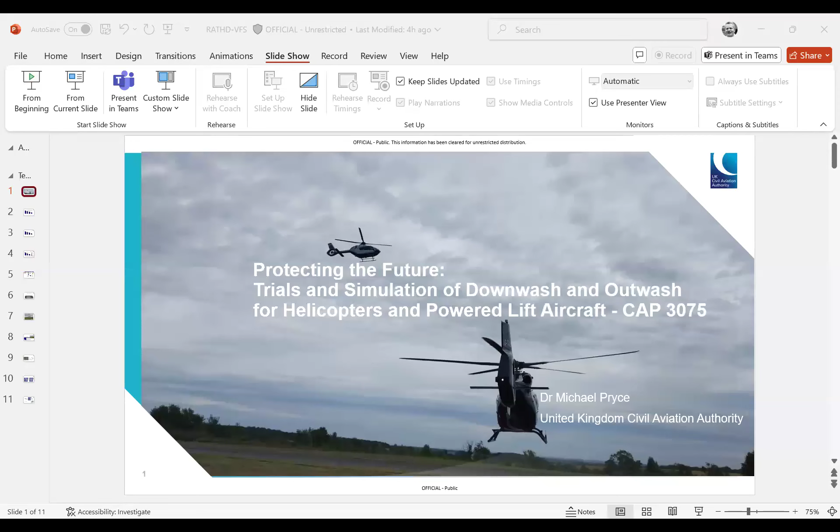I'm going to try and share my slides. It's that part of the presentation where we hopefully see that it works. So hopefully you should see some slides now. So we're seeing the regular slideshow, not the presentation mode. It should be. Yeah, you should. There you go. Okay. That looks great.

There you go. I know a lot of interest will possibly be around the eVTOLs around this presentation. The picture there literally paints 1,000 words. Most of our research has been done on helicopters in the real world and simulations on eVTOLs. And the key part of the work we do lately is how do you relate current knowledge to future aircraft? So we've published a paper recently, CAP 3075, that's available on the CAA webpage. CAP 3075 is a fairly light read, I would say, but it's backed up by another paper that I'll reference during the presentation that Richard did a lot of work on, that has the maths and so on.

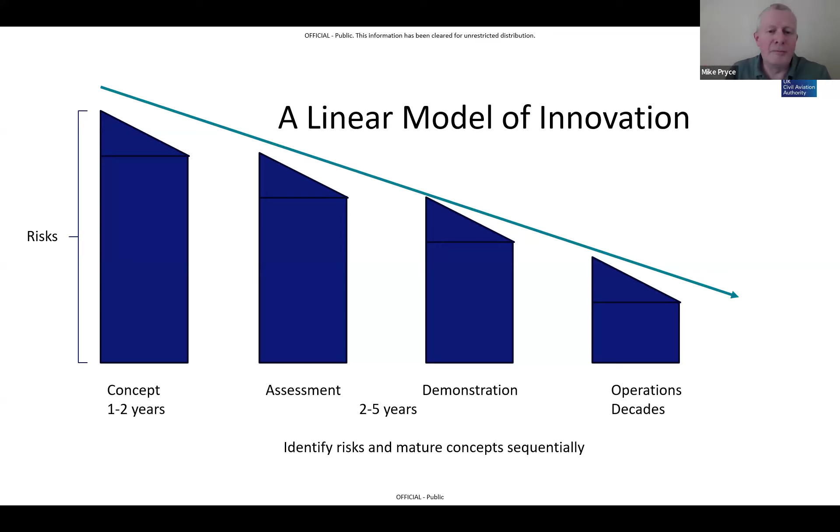I'm going to start by presenting the background and the philosophy to the work. And obviously, because of that interest in eVTOL that the community has, there is a kind of a linear model of innovation, which is you start off with a lot of uncertainty and risk, and you try to winnow it down over time. If you're an OEM, you might generate a large number of initial designs, and then you fly a prototype, and then you refine that prototype, and you end up with an operational aircraft. And if you're a regulator, you kind of look at these new concepts and you think, well, what do we need to do to change things, potentially change regulations to enable them to fly? And that's a very straightforward process, and it looks very neat on the screen.

Reality and innovation is often messier, however. But there is one thing about aviation. It's not entirely new. There is a lot of experience and knowledge out there. Can we use that experience and knowledge from current operations to feed it back into new concepts, into all the work that has to be done to get from the design screen onto the flight line? And the key thing, I think, is that with innovation, it's all about change. There are things you hope are going to happen that don't, and vice versa. But if you focus on your objectives, which are safe, reliable aircraft that make money and give consumers what they want, then you can be flexible in the processes. And that's the approach we've taken in part of the CAA.

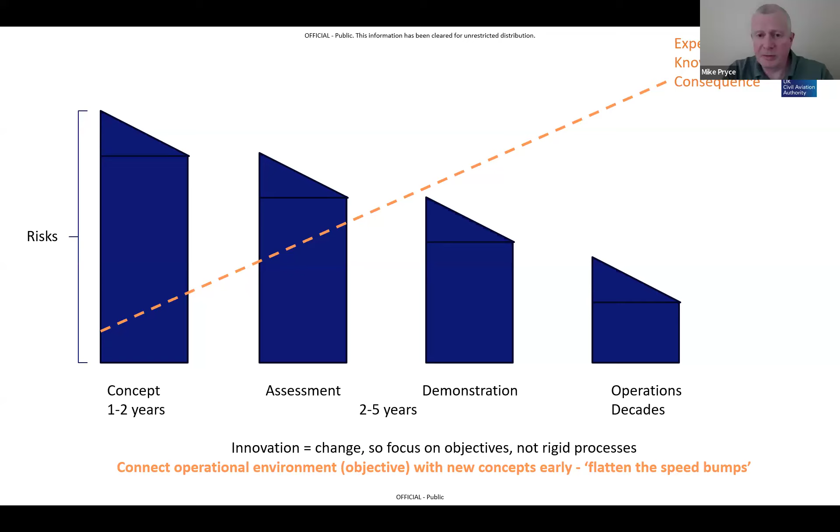So we have an innovation team who are doing the left hand of this picture with industry. We're also working with the right hand of this picture from the operations perspective, trying to see how we can work with our innovation colleagues, inform them from current operations. And really the way I think of it is we're out to kind of flatten the speed bumps that may be lying in the way of innovators so that they don't have any surprises.

But one surprise we did have was an accident in the UK 3 years ago now, where a search and rescue helicopter, a Sikorsky S-92, was landing at Derriford Hospital. In the UK, because we don't have many wide open spaces, hospital landing pads are often quite close to the hospital. In this case, it was in the hospital car park. There was what they call a blast wall to try to protect the public. But a member of the public was blown over and tragically killed. There was no fault from the operators and the pilots. It's just the nature of downwash and the proximity of the third party.

Obviously, that gets a lot of attention in terms of any aviation authority. Uninvolved third parties on the ground are a no-no. You just don't want anything to happen to them. Certainly not a fatality. So what we wanted to do is, could we learn from this incident and consider possible risks for eVTOL downwash so that we can enable eVTOLs to operate safely and for people on the ground to remain safe when they do so? And the objective really is to kind of push down that learning curve earlier on in the cycle from current experience.

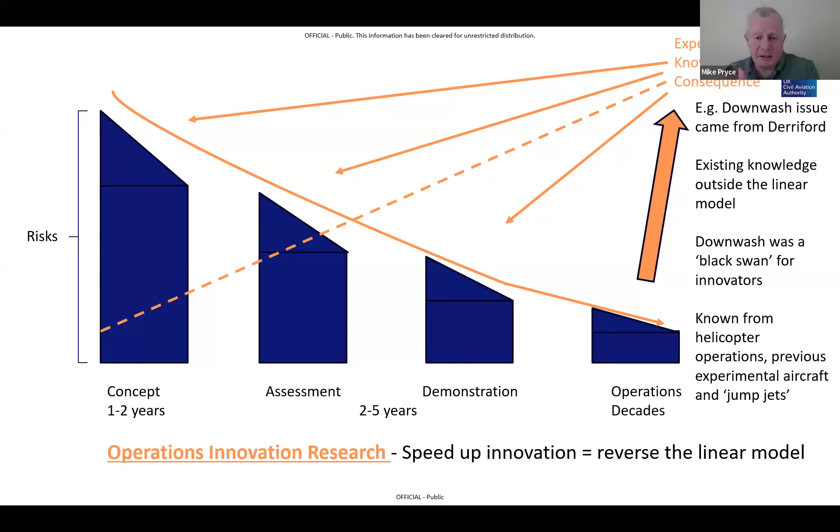So the process I've named it is Operations Innovation Research, but it is very much working backwards. It's working from the current world we're in and trying to inform future innovation as it's coming down the pike.

So with that theoretical aspect looked at, what we considered was, well, we kind of want to go on a journey, and we don't want to just be preaching theory to people. We want to come up with a bunch of tools that they can use. But to get those tools, we'd have to do some work.

And where we started 3 years ago was there was a body of work that's been created by NASA, companies like BAE Systems in the UK, Cranfield, Dstl. I've worked in some of these places, seen some of this work. And in the CAA, we had already been informally considering this around eVTOL and helicopter downwash.

Then the Derriford accident led to a directive from the CAA board that we need to investigate this. So we went out to industry for some research tenders, and Sophrodyne was selected. As doing the process of selection, there was quite a wide variety of approaches you could take to this work.

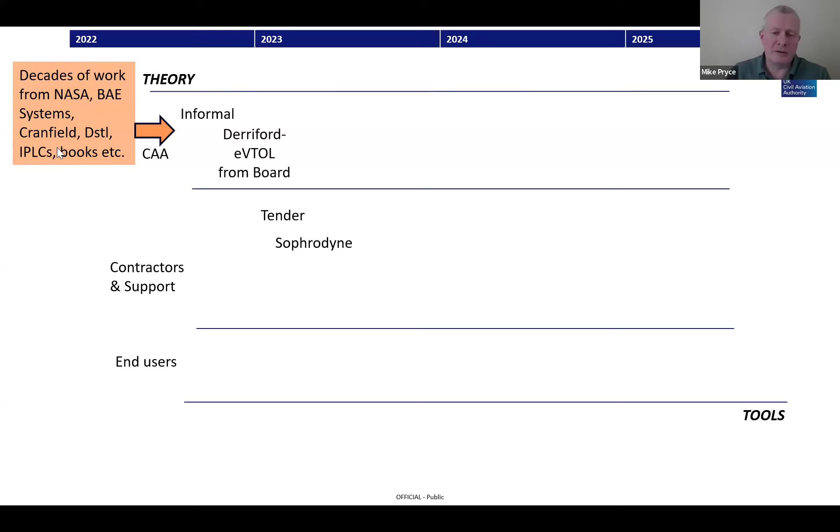So one of the things we did at the CAA is we came up with our own literal PowerPoint engineered configurations, very simple aeroplanes that you could add or take away different propulsion concepts to them so that we could compare digitally a range of different concepts. That was informed by the previous literature we had. That was handed over to Sophrodyne.

They ran their simulations, and Richard Brown will tell you it's not as easy as I just made it. I think some of the simulations, just one scenario, would take 6 weeks to run. So quite a lot of software was running this, a lot of processing power.

Sophrodyne wrote a report CAP 2576A, which is about, I think, 85 pages, if I remember rightly, very mathematical. We topped and tailed it with an introduction and some appendices, and issued that as CAP 2576 in October 2023. But the key thing there was we briefed it to industry.

We had some involvement. There were some offers of real world data, although at the time we weren't able to get them. But from the simulations, what we could see is they pretty well matched with what we expected from the work that had been done and the configurations we generated. But we did want to have a more specific verification and validation process.

So we came up with this project called RATHD, a research assessment of transitory helicopter downwash. And the reason we went for helicopters was in the UK at the time we had no flying eVTOLs, but also as part of the work for CAP 2576, we had looked at helicopters, both conventional disc loading helicopters and an imaginary helicopter with the disc loading of an eVTOL.

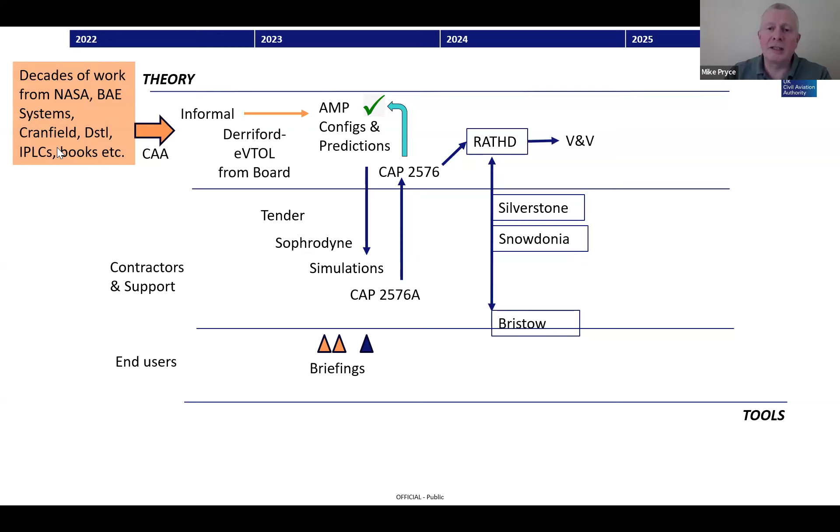Also, because it was large, we knew that we would be able to get significant readings from it without necessarily putting us in too much danger in terms of having to stand too close to the helicopter. So the object there was to verify and validate what had happened in the previous work with Sophrodyne. But Sophrodyne also were given some data that we'd measured and asked to simulate that, see if what you can run in the simulation matches what we found in the real world.

While this project was going on, we also got data from the FAA, where luckily they had 3 types of eVTOLs they could access there, and they had actually measured some real world data, so that was thrown into the mix. As you'll see, if you access on the CAA website CAP 3075, all that's written up. But the objective is to have these tools, and these are what we're now working on.

But there was also a surprise, which was a cognitive issue. When we were doing the real world measurements, what we found is we became cognitively impaired. I'll go into the detail in that a little bit more. And it struck us that that's something that hadn't been seen before, but obviously for third parties on the ground could potentially be quite significant. So we also fed that into the approach of generating tools, and we briefed industry and incorporated the FAA data as part of that activity.

chaotic situation. And as Richard will talk about, we have this assumption that helicopter downwash is just a perfect circle almost. But in reality, what we found and what we felt was actually it's much more turbulent, much more chaotic, and also unexpected in many ways. I think there's mental models that are created by training handbooks and textbooks and so on that make you think it's going to be a steady wind, but actually it's a series of powerful gusts that you feel in a constant outwash field, supposedly. And it's the nature of those gusts that appear to be quite unsafe and cause risks for people.

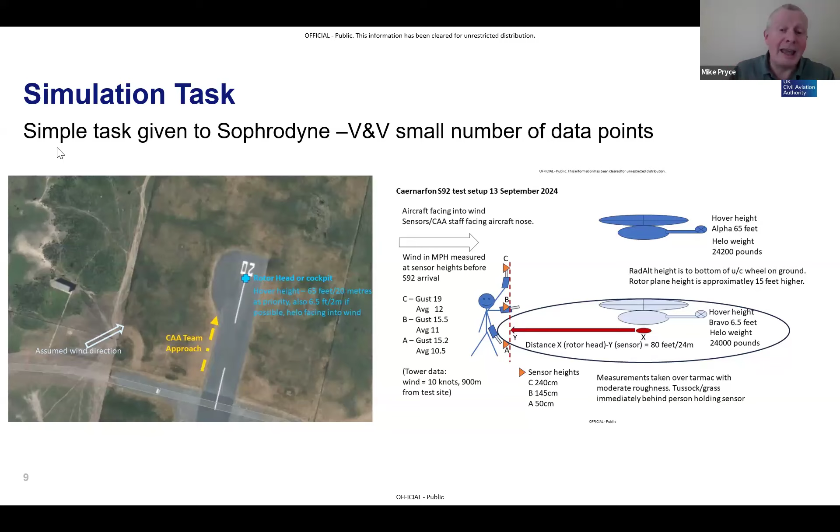But the key thing was we got quite good measurements, I think, considering we were using really coarse tools. Initially, my belief was we could do quite sophisticated analysis on the data and produce a distribution of probabilities and so on using Weibull analysis. In reality, the physical experience of feeling downwash made me question some of that, because what the data shows versus what actually seeing the air tells you struck me as being more important. And again, Richard will show that in some of the videos he's showing.

But what we did see when we got to see the air was, these are simplified egg-type helicopters. Sophrodyne also simulated much more detailed S92 models. But what we saw was a lot of the training manuals have instantaneous average velocities in effect.

The picture on the right there, there's a donut, a circular pattern of airflow. That's what downwash is. If you draw a line around that, you can stay outside the danger area. And what we found with helicopters was actually it's much more turbulent. The red is the higher velocities, and that kind of accorded with the experience.

It literally felt like being punched by the air when you stood in front of the helicopter. It's not being pushed over by a constant force, it's being buffeted backwards and forwards. And actually that can disturb your balance, and it can be really challenging to deal with. At the same time, if you expect it, it's less challenging, is what I found, and other colleagues seem to.

But you can see there on that picture that in some cases there's virtually, I mean, this image I like because it accords to our test conditions, which is 30 degrees off the nose to the left. There was virtually nothing that we felt initially, but right on the nose, there were more powerful flows that we could feel. The animations that Richard showed will bring this to life in a much more interesting way than the static images.

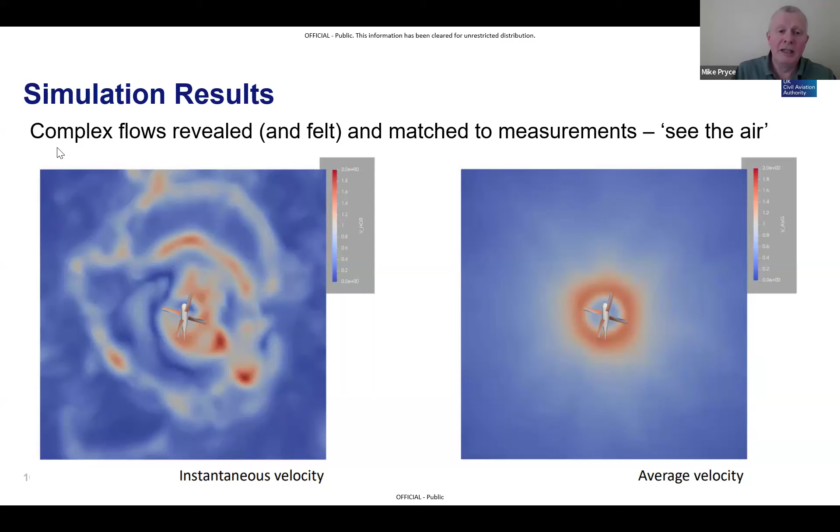But I think that image does capture the fundamental findings of a lot of the research, was that helicopters have chaotic patterns of outwash, just as we had predicted in our earlier work eVTOLs would. And it's an interesting finding that we have lived with these patterns of helicopter outwash for a long time. So perhaps we can really learn from them to inform eVTOL operations.

But what we felt was that the verification and validation that we'd undertaken had worked within the hoped-for outcomes. It hadn't necessarily followed the path we'd expected, but with all research, I think you have to expect the unexpected and deal with it as it comes up. And the cognitive side of things certainly brought that up. But equally, the chance to visualize air rather than just simply gather data on it, I felt was important.

We did use simple equipment, and this is an approach that could be a method that the user community more broadly could follow with limited training. So I think that one of the interesting things about this work is it does offer the potential for a simple approach to be used by people to start to get a feel for this issue.

But the outputs, really, the tools that we come up with are, as Richard will show, the videos. I think we can use the videos that we use as part of the simulations actually for training. The visualization of the airflow is hugely important. I think when Richard first showed me one of his videos, I told him I wanted to give him a hug because it would save lives. It was that powerful of a feeling, because I could literally see in the simulation what you feel standing in the position where I was, looking at the helicopter as the simulation showed it.

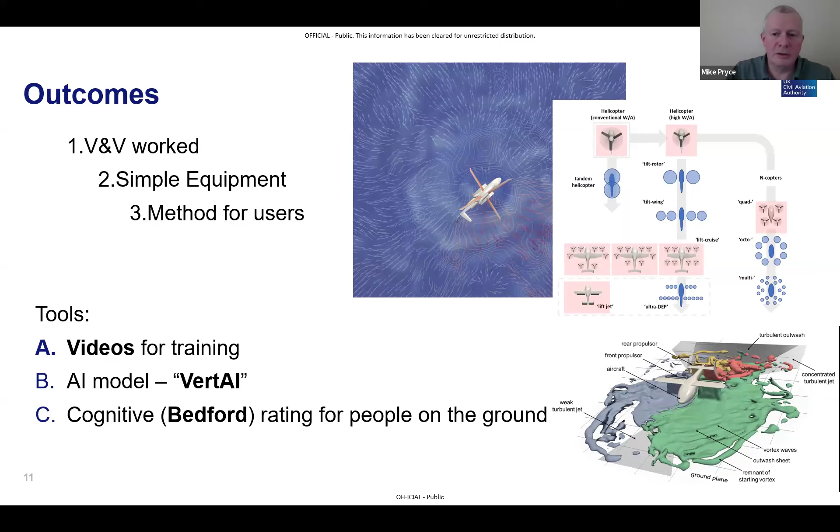All right, let me see if I can start this successfully. Okay, hopefully you can see the presentation. Yes, perfect. Excellent.

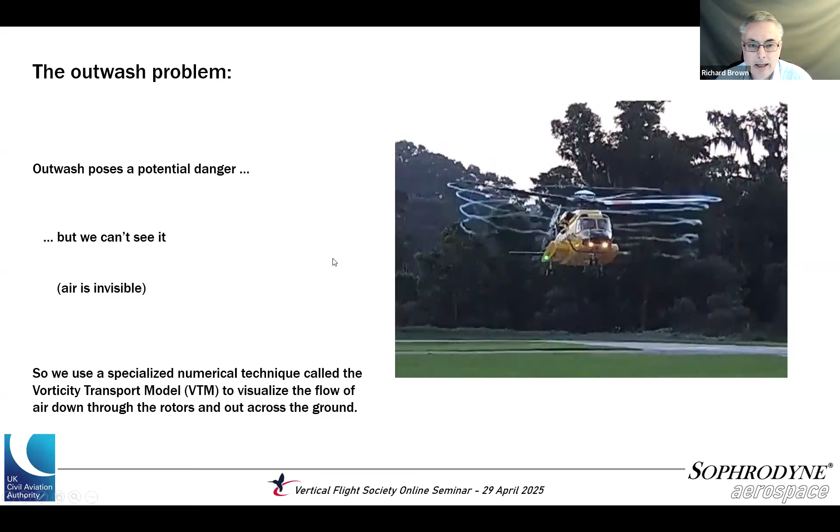Now, the VTM is a well-established method. It's been in development for something like 30 years. It's been used extensively to model various particular aerodynamic issues surrounding rotorcraft. But outwash was perhaps one of the most challenging applications of the code that we've come across so far. Let me try and explain to you a little bit of the detail of how we would go about simulating a system like this. The first thing, of course, is when you set up a numerical simulation is you have to have some sort of faith in its predictions.

And so what you tend to do is you start off by constructing your code and verifying that it actually works mathematically, but then you go through a process called validation. And what that involves is comparing the predictions of the code against those parts of the flow that you can actually visualize in some sense. So what I'm suggesting here is that in a very simple fashion, we might go about comparing the predictions of the VTM, in this case of the positions of the tip vortices, with the positions of the tip vortices that we see in real life. And we might be interested in measuring, for example, the spacing of the tip vortices, how fast they decay down below the system, and trying to confirm that the code is working properly against what we see in reality.

And that tends to be a back and forward process. So when you measure things in the real world, sometimes those measurements are subject to inaccuracy, and the numerics can actually inform better measurement process. And in some cases, the real world yields information which you can incorporate into the numerics and improve the predictions. And I think in terms of the outwash situation, that's exactly what we're looking at here. This partnership between numerics and real world measurements is where we're going to really make progress.

But now, again, as I said, we're not seeing the whole picture here. So the real value in numerical simulations is being able to dig in and show parts of the physics which you cannot see by any other means. And that's what I'm going to try to explain to you in the next few slides. Okay, so let's step back a bit. So I'm going to step back really far, and there's my helicopter now hovering at some altitude above a big flat ground plane. Okay, we don't see much more than we would see in real life. But now let me do something. Let me take my numerical results and try to visualize those.

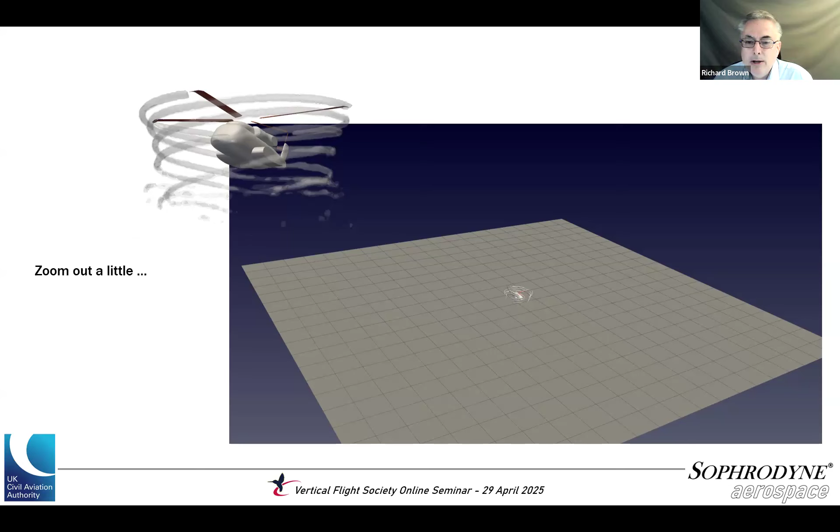And what I'm going to do here is plot a contour on which the vorticity in the flow has a constant value. The vorticity is the swirliness of the flow, if you like. It's associated with the tip vortices and the various structures that evolve as those tip vortices themselves disperse out across the ground plane.

Now, let me go a short distance into one of these simulations. So let's say something like 6 seconds or 25 rotor revolutions, if we're talking in real terms. And what you can see when you start to visualize these contours of vorticity is that the flow out away from the rotor has actually a tremendous amount of interest, and structure even. Okay, so what can I see here? I can see structures busy evolving out across the ground plane. And in fact, if I dig away at these simulations, I could see some of the fundamental physics taking place in front of my eyes.

So those very fine tip vortices that I showed, well, you can see them over here at the top of the slide. What we need to realize is that that vortical structure is inherently unstable. And as those vortices propagate down towards the ground and spread out, that instability morphs those vortices into much larger, more coagulated structures, which then propagate out across the ground. And eventually those structures all change in configuration and eventually dissipate through becoming tangled up in each other.

And if you have a look very, very closely, you can see some very interesting features. Let me change my pointer here so that you can see a little bit better. But you can see, for example, 2 vortices catching up here and about to roll around each other and turn into a bigger structure. Here you can see a bigger structure already formed.

And over here, you can see something really, really interesting, which will become very important when you talk about eVTOL outwash, and that is the formation of a hairpin structure on the ground. You can see this kink busy forming into, like a promontory, which will eventually lift up off the ground, turn into a vortex bullet and shoot out across the ground, causing very high local velocities.

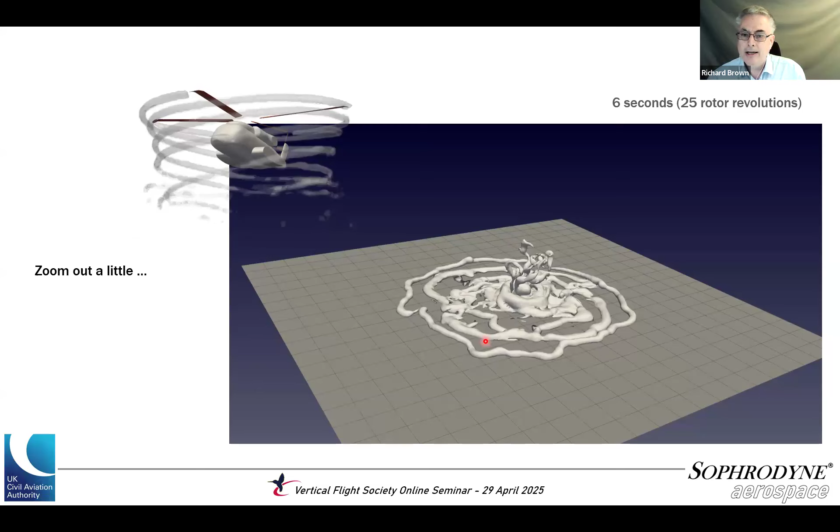Now that's 6 seconds into the simulation. That's nowhere near enough to be able to understand what's going on in the full simulation. We have to run these simulations for hundreds of rotor revolutions before the flow actually establishes itself properly on the ground. So if I do that and I advance the simulation here to about 250 rotor revolutions, you can see just how complex that outwash field actually becomes.

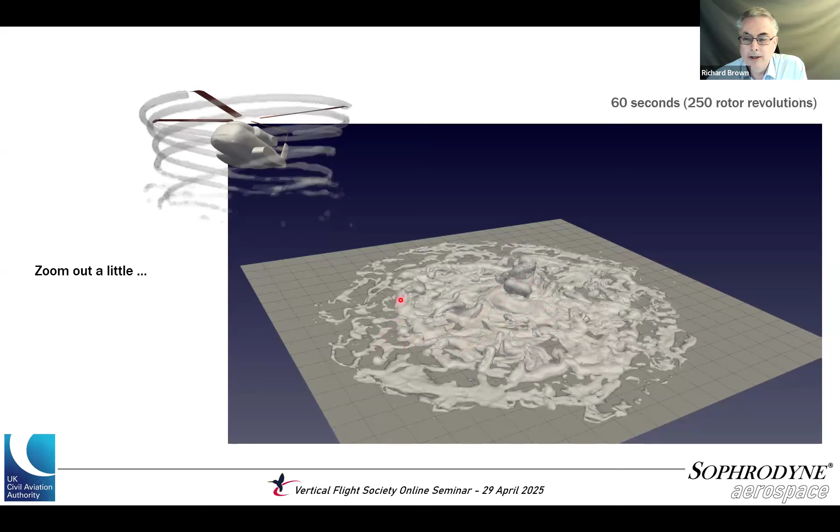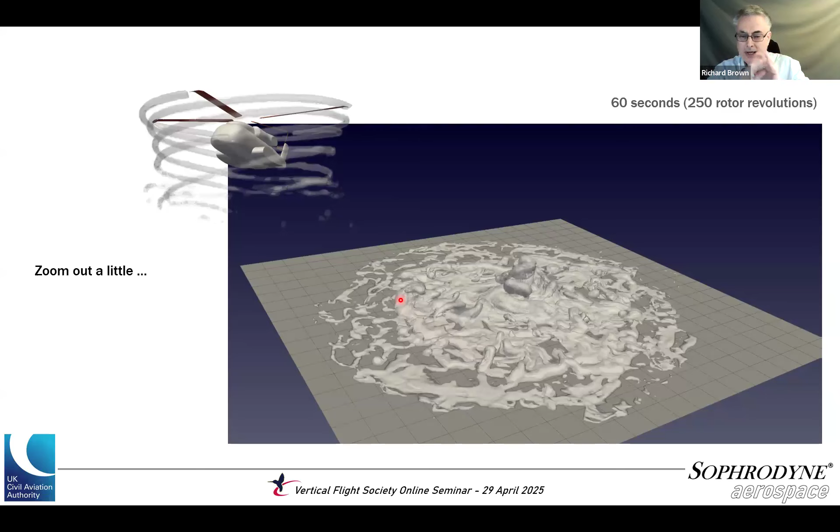So there is structure sitting inside here, but that structure is slowly morphing as the flow moves its way out across the ground. These bigger structures form, they interact with each other, they coagulate, they intertwine, they crenulate, and eventually they destroy each other through forming smaller and smaller structures. Almost like a descent from order into chaos. I wouldn't call it turbulence, but it's order into chaos, if you like.

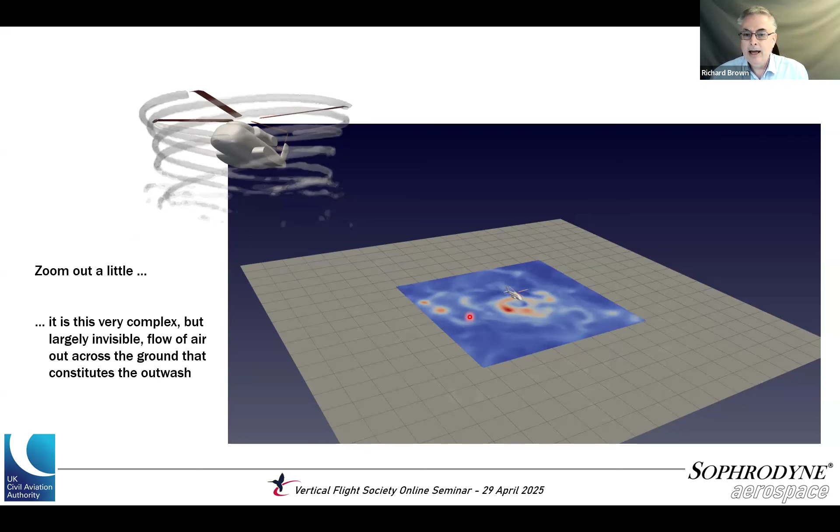Now, it's these individual structures on the ground that are responsible, in fact, for the velocity distribution on the ground. So if I try to show that, you can see in this picture here that the structures in the flow, these vortical structures, are responsible for the particular pattern of flow that we see out across the ground plane. So there we have it. We've gone from the structure of the flow to visualizing the velocity near the ground. And as in Mike's representation, throughout this presentation the higher velocities will be in red and the lower velocities will be in blue.

Okay, now, as Mike alluded to, one of the big problems within the community is that the traditional view of the outwash is as this steady, axisymmetric stream of air out down below the rotorcraft. So the flow comes down through the rotor, bends out when it hits the ground, and just continues outwards as a normally radially symmetric, uniform stream of air.

There's some theoretical justification for that particular approach, but generally what we're forced into when we do that is to adopt a turbulence-like approach rather than this order into chaos, this idea of vortical structures which evolve. Essentially what we tend to do is we adopt an approach which is something like this. We say that there's a mean velocity profile on top of which we can impose certain perturbations.

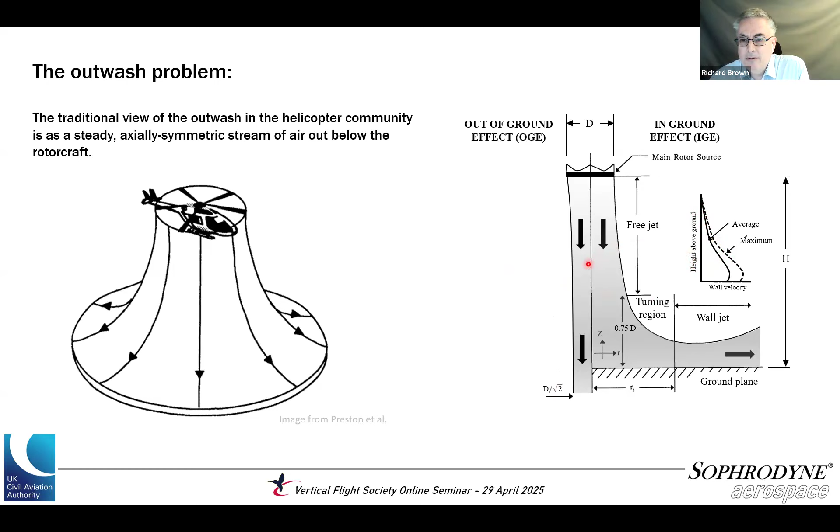But the whole idea is in terms of this mean, the steady flow of air on top of which there might be a little bit of wiggliness that might influence things. Now, the problem with that particular approach is that it's not particularly accurate, for one thing. The second problem is that this simplistic view of the outwash pervades a lot of the safety information that the

industry presently relies upon. So to pick on 2 particular examples, you'll see in this particular report, here's this idea of this inverted cone of outwash spreading out across the ground, if you like, and a few interesting effects, perhaps, of adding wind or movement across the ground. Now, believe you me that when you look at the simulations of these particular cases, the flow is a lot more interesting than you see in those particular examples there.

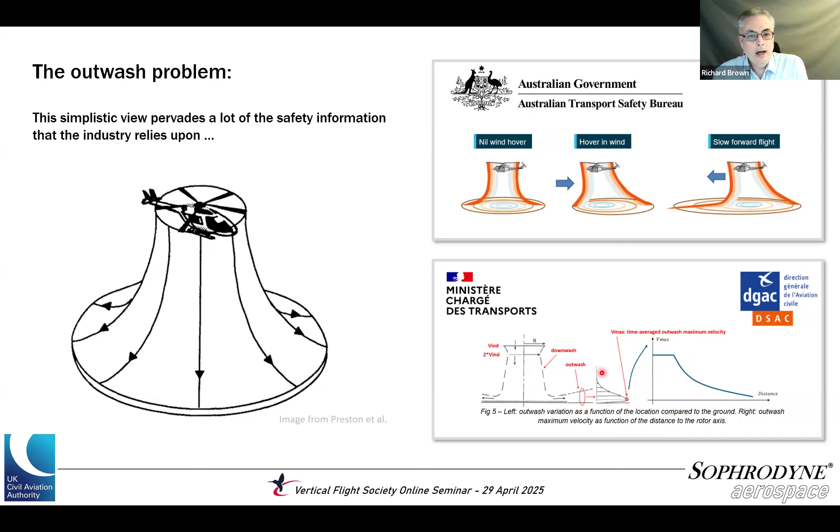If we have a look at this particular example, then this momentum-like idea of the outwash coming down and hitting the ground results in a model for how that velocity varies out across the ground. Something like this. And that has informed quite a lot of safety information that we use in the industry up to now. But the model doesn't actually represent physical reality particularly well.

Okay. Now, the interesting thing is that if I do run the simulations for several hundred rotor revolutions and try to calculate the average velocities in the outwash, then you do see this radially symmetric pattern. So the flow is axially symmetric about the helicopter, assuming that I haven't put in a tail rotor or any interesting fuselage interaction effects. But the flow tends to be axially symmetric and radially outwards in all directions. But this is only true in the mean.

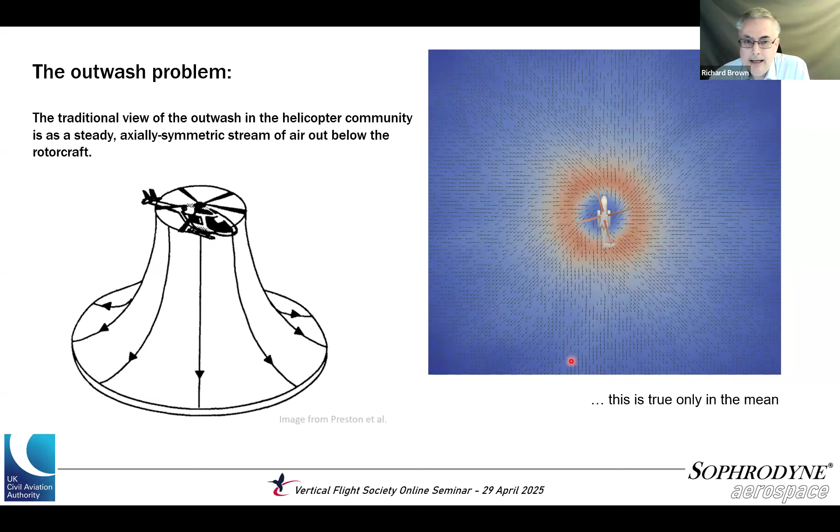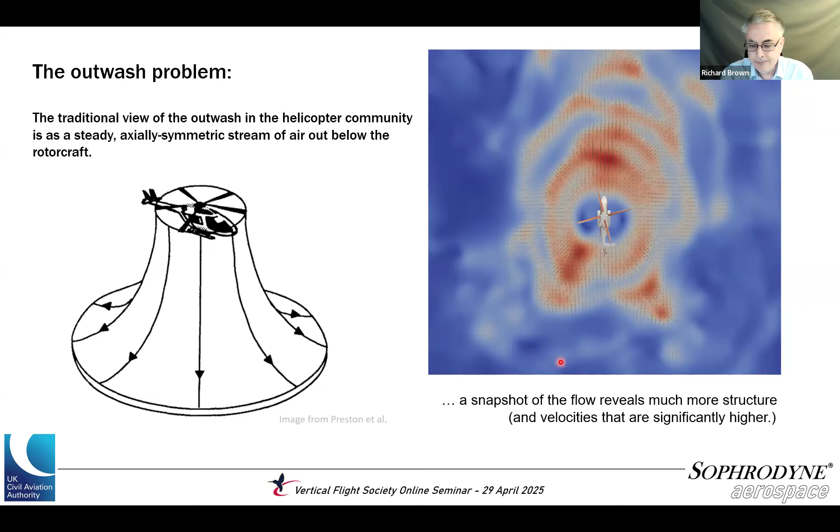And the mean, calculated over several hundred rotor revolutions, has very little reality or relevance to the case of somebody actually standing in that outwash and experiencing the outwash, where we know from our simulations and from Mike's measurements that the snapshot of the flow, an instantaneous picture of the outwash, shows that the velocity is much more inhomogeneous. There are these wave-like structures, if you like, these gusty-like effects, which propagate out across the ground and cause the flow experience at any particular point to be very unsteady and difficult to negotiate, as Mike experienced.

Okay, so much for the still images. What I want to show you now is a few videos which try to illustrate this in a little bit more detail. So this video shows how the velocity on the ground below this helicopter actually evolves with time. It's the S-92 hovering at fairly low altitude above the ground, and you'll see how the flow is actually very, very unsteady and granular. By no means radially symmetric.

It consists of these waves of vorticity, which result in this gusty outwards flow of air out across the ground as time proceeds. I'll let that run to completion, just so that you can get an idea of how unsteady the flow across the ground can actually be.

You can see how variable the flow is from time to time as well. Sometimes the flow is fairly quiescent, then all of a sudden a very strong and powerful gust will reach you, depending on where you're standing within that outwash flow.

Okay, so let me skip to the next slide. What I want to do is I want to make things a little bit more tangible. Now, Mike had this anemometer and he was standing in the flow at a particular point. Let's make things a little bit more concrete. He was standing around about there compared to the position of the aircraft. What would he have actually measured with his anemometer?

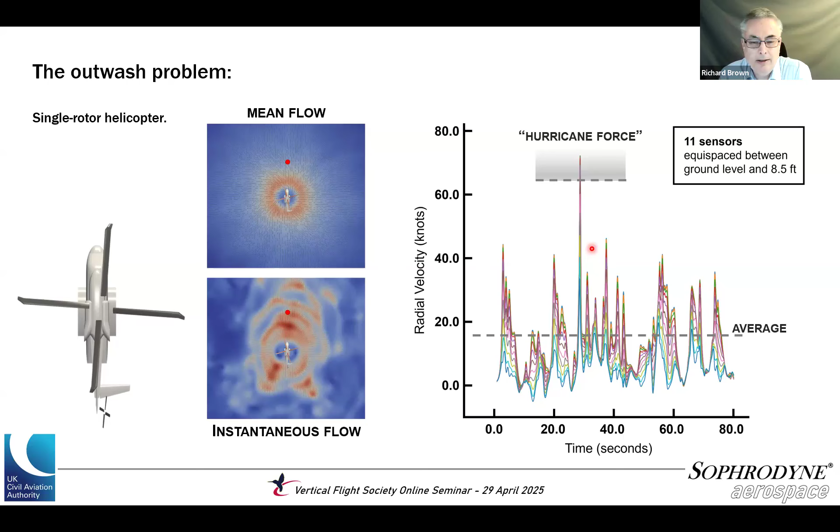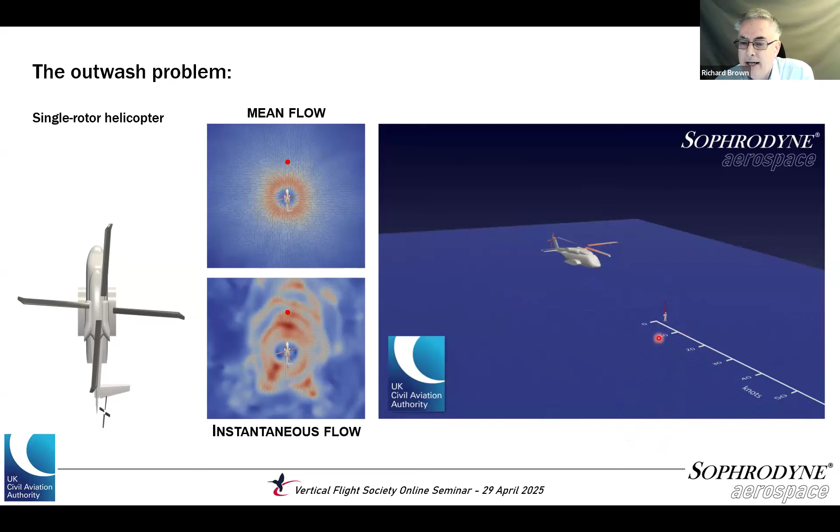Now, let me try and run that simulation and have a look at how the velocity varies in time according to the scale that I've put on the diagram over here. This is the knots, nought up to a much higher velocity over there. Whoops. And let me run that. Okay, and watch that scale and watch how the velocity changes as time goes on.

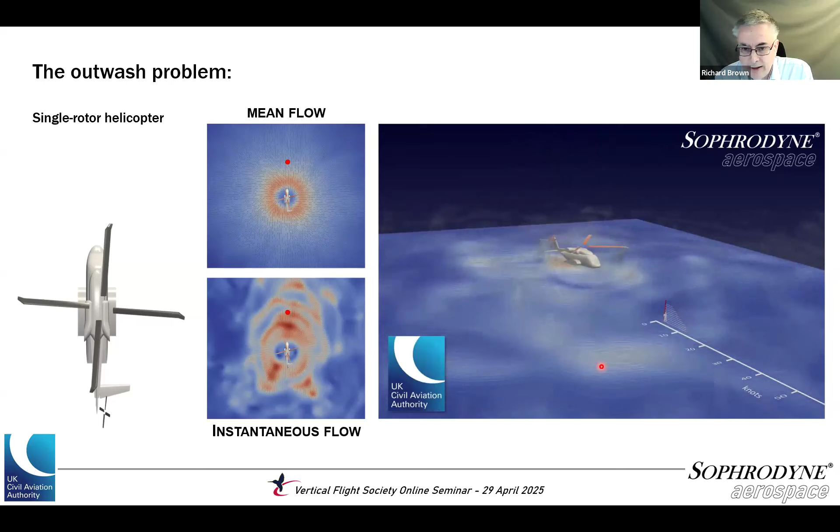Now, hopefully you'll agree that the numerics, when cast in this particular form, yields very visceral and direct insights into just what's going on in the flow. We can see how the velocities vary with time. We can see how the velocities vary with altitude above the ground at any particular point. And we can also relate how those velocities are interconnected with the various features in the flow that might be driving those particular velocity distributions. Okay, hopefully you get the picture.

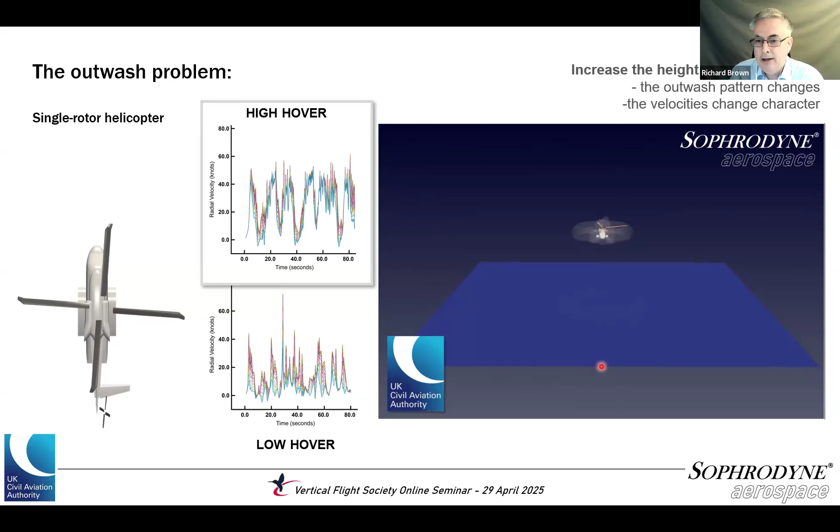Now, what happens if I change the system a little bit? Now, this is an important issue. I think some of us in the community believe that perhaps outwash is an inherent characteristic of a certain aircraft, so a certain aircraft will produce a certain amount of outwash under all conditions. And of course, that's not true. The operating conditions of the aircraft make a big difference. So let me increase the height of the aircraft above the ground. And what you'll notice is, in fact, that the outwash pattern changes quite considerably.

So first of all, the downwash streams down, hits the ground, turns outwards, and starts marching off across the ground plane in terms of all these structures. But you'll notice something interesting happens with the aircraft at this particular height. In this simulation, I've included the tail rotor, and what the tail rotor tends to do in trimming the aircraft is sometimes to drive the tube of flow coming down from the rotor out towards the side.

And when that happens, you can see a highly directed flow of outwash coming in the direction of that distortion of the wake tube. Now, what that means for the velocity as measured at the ground is something quite profound. You can see that the whole qualitative character of the outwash changes just because the flow structures are changing in response to the operating conditions of the helicopter.

So here we have this very high frequency variation. Well, it's a variation over a couple of seconds in these pulses of velocity, or these gusts of velocity that are experienced by the observer on the ground. Here we can see that these gusts are much more long-lived. There's almost like a rush of air outwards, which is then replaced by a quiescent period, which is then replaced by another rush of air outwards. And this is because of this redirection of the jet of flow coming down from the rotors and spreading out over the ground.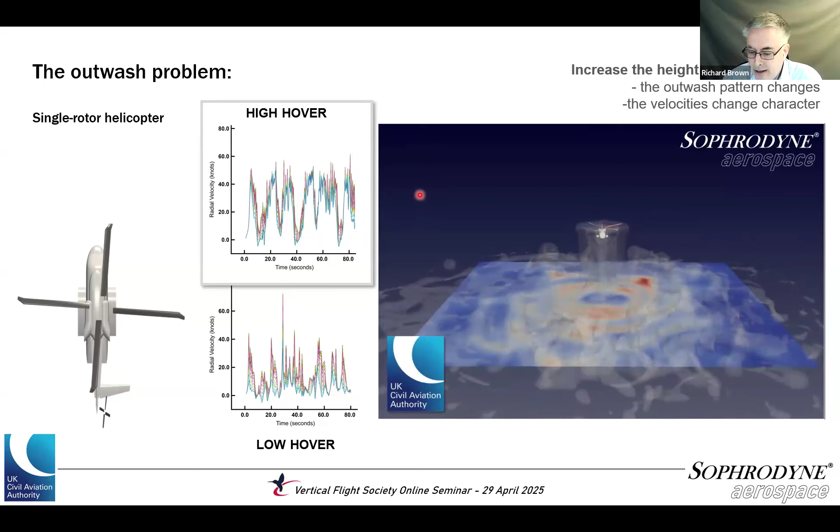Okay, and my very last slide in terms of helicopters is this one over here, where I thought what I'd do is I'd put you directly in Mike's place and allow you to experience the outwash with the aircraft in a high hover as seen by Mike while standing on the ground. And this video kind of illustrates the point that Mike was trying to make, where the idea is that perhaps we can present people with this sort of information a priori before they get on an aircraft or before they step into an eVTOL so that they can actually appreciate just what sort of situation they're going to get themselves into before they get into the aircraft itself.

So perhaps much better than some obscure sign at the edge of a vertiport saying, beware downwash. If somebody doesn't have a clue what outwash is, then perhaps we've got a bit of an issue there. And perhaps they can watch this like a pre-flight video or something like that before getting into the aircraft. But here we go. We're immersed in the outwash. You can see this gustiness, these gusts heading towards you, and we can gain some sort of appreciation of just what it might be like to stand in the outwash below a large transport helicopter like this.

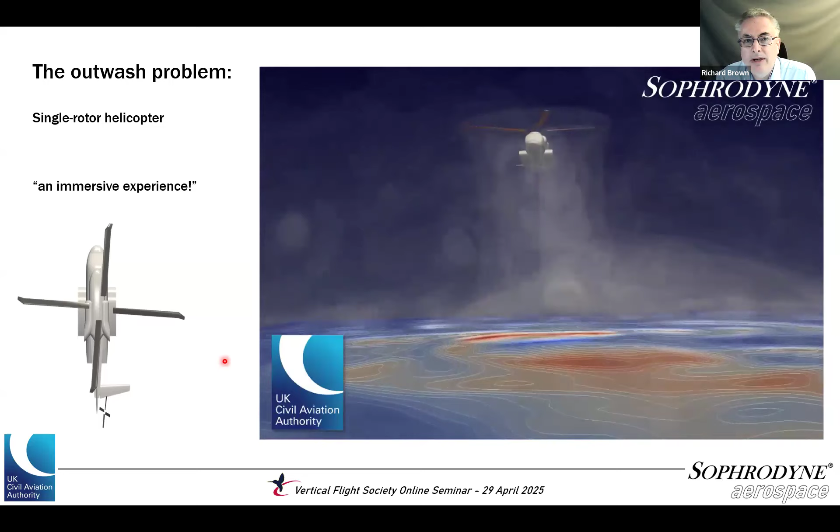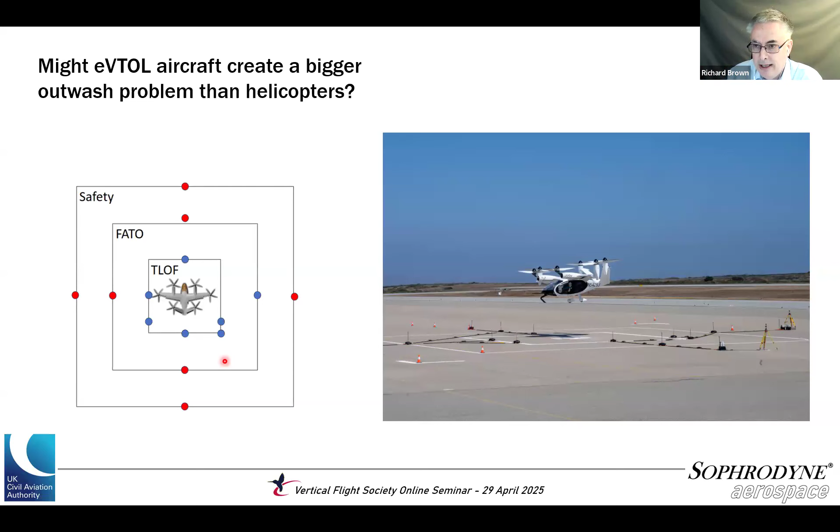Okay, now let me try to give you a bit of an appreciation of where we're going with this work. As Mike alluded to, part of the justification of this work is to extrapolate to the case of eVTOLs and to try to understand how eVTOL outwash is generated and what makes it different to that generated by helicopters. And these slides you're probably all familiar with. There's been a fairly extensive program of experimental research done in the US to try to quantify the outwash from certain eVTOL aircraft. Now, our initial work on this subject was published in October 2023 as CAP 2576. And you can get that report from the CAA website, and Mike's talked about it in some detail before.

But one of the really surprising issues that we found with the outwash from eVTOL aircraft is firstly that because of their higher disk loading, the outwash velocities tend to be somewhat higher than those generated by helicopters with the same weight. But even more importantly, the shape of the outwash out across the ground is very, very significantly determined by the actual configuration of the aircraft itself.

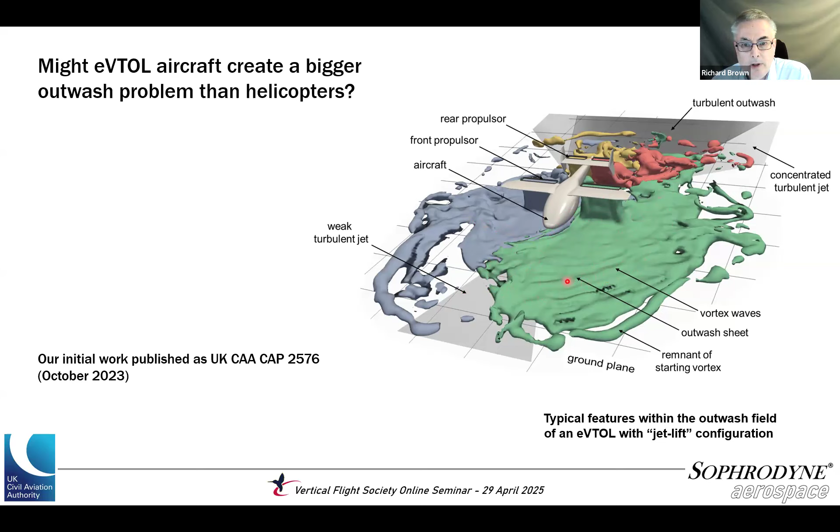So in this case, what I've shown is one of our simulations of a rather exotic jet type aircraft where the propulsors are these linear jets rather than rotors. And here I've colored the wakes from each of these jets in different colors, and you can see the various structures that evolve. And what turns out to be very, very important in these multi-rotor cases is, of course, the interaction between the flows from each of the propulsors, because it's there where you tend to find most of the maximum velocities, or at least the most unsteadiness in the flow itself. But if you're interested in this, then I'll promote CAA CAP 2576 to you as a good place to start to try and appreciate some of the underlying physics.

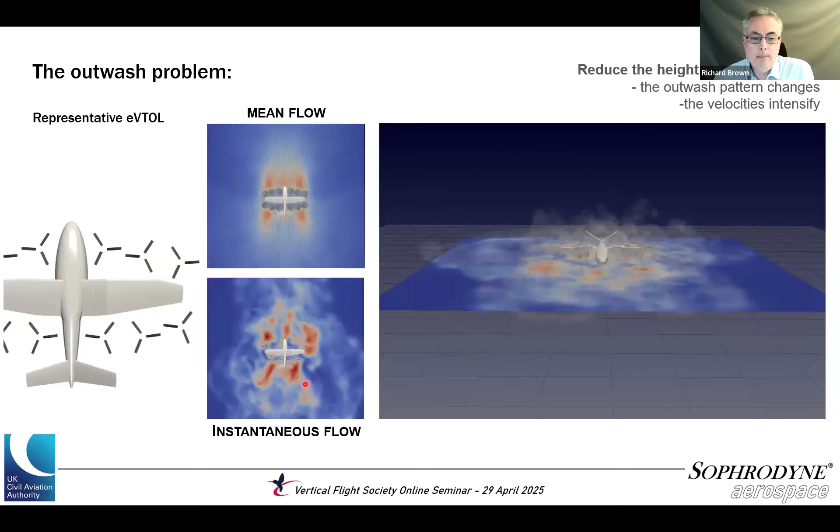If I changed operating conditions again, though, by bringing the aircraft a little bit lower towards the ground, then again, the characteristics of that flow change. This picture of the mean flow suggests that something much more interesting is going on. And indeed, if I run the simulation, you'll see that the structure of the outwash across the ground has actually changed quite considerably in character. So instead of these little granular pockets of high velocity spreading out, we now get what I call this flaring behavior, if you like, where we end up with these rivers of high velocity air jetting out across the ground to quite a significant distance away from the aircraft.

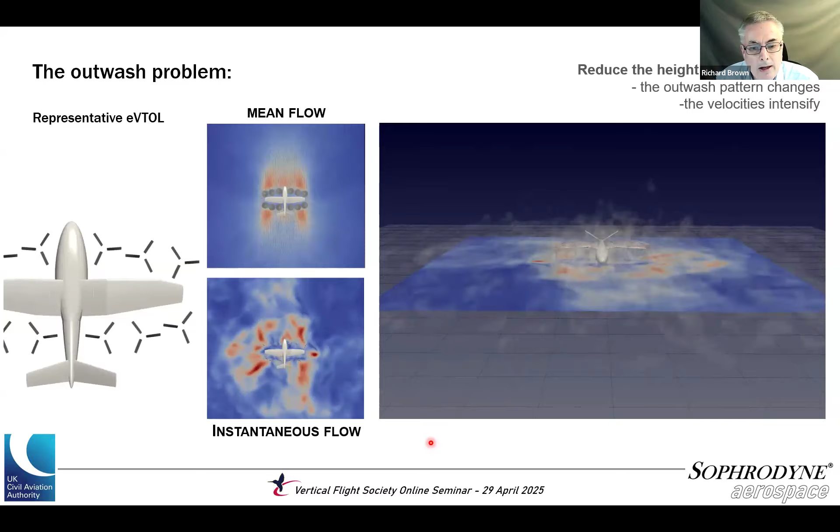The other thing that we might ask ourselves in terms of characterizing the outwash from this aircraft is how relevant is the characteristic dimension? Generally, if you take a fairly simplistic approach, there are some folk within industry who see the characteristic dimension of the aircraft almost like a rotor diameter, and see the outwash through the boundary of that characteristic dimension almost as this radially symmetric flow that you'd expect to see underneath a conventional single rotor system. And these sorts of visualizations show very clearly that that's nowhere near the case. The flow out in the outwash is much more directed and much stronger than you would expect in the case of the helicopter-related outwash based on the characteristic dimension.

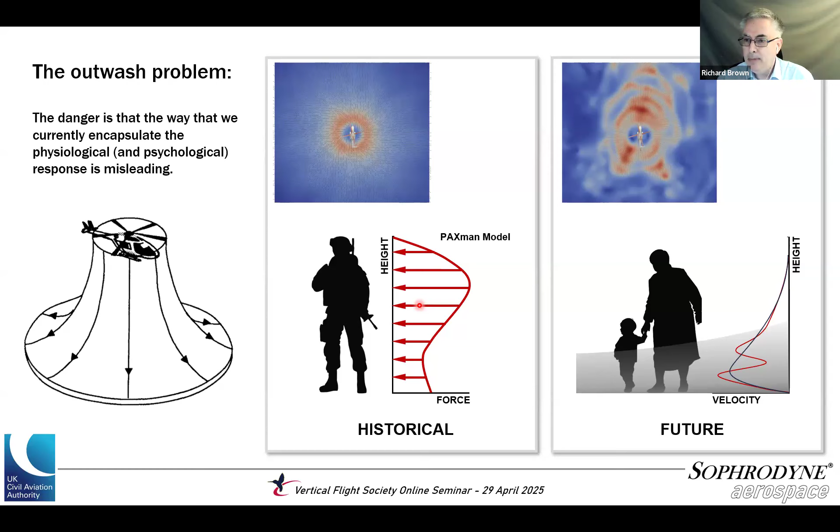And in terms of acknowledging the unsteady nature of the outwash and this transient effect, this buffeting, this idea that the velocity comes from all different directions and changes significantly as time goes on, I think that is one of the crucial areas that this study has actually illuminated, and one of the key issues that we need to address properly as scientists and incorporate into our understanding of how the outwash will influence the people that are going to use these machines in future.

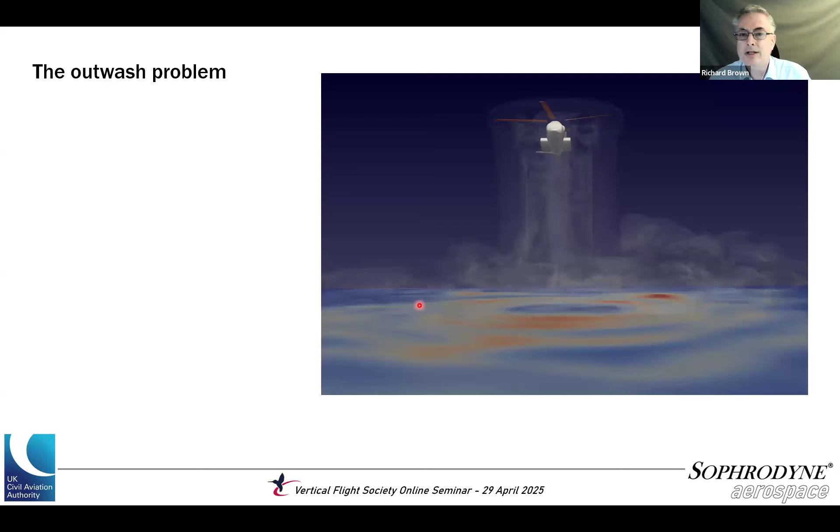Kyle Ferguson basically states a paper, Mira et al. 2024 from the FAA was published, and in it they stated computer performance issues affecting the simulation data. It seems that it is not an issue here. Is there something drastically different about the modeling used here and the modeling the FAA used?

Yes, is the simple answer. We've written extensively about this. If you go back to 2023, I wrote a paper which I presented at the European Rotorcraft Forum, where I discussed in quite some detail the types of numerical methods which you might bring to bear, given what the community has to hand, and how effective those would be in terms of modeling the outwash below an aircraft as complex as an eVTOL, especially one with, let's say, 12 rotors. Not all numerical methods are actually up to the job.

As I mentioned right at the beginning, this is one of the most demanding applications of numerical methods in the rotorcraft field that could ever be thought of. And one needs to be really careful in terms of one's mathematical formulation of the equations and how one goes about solving that mathematical formulation, that you're obeying certain very fundamental physical principles and mathematical principles. And the methodology that we use has actually been constructed to preserve those particular characteristics of the system.